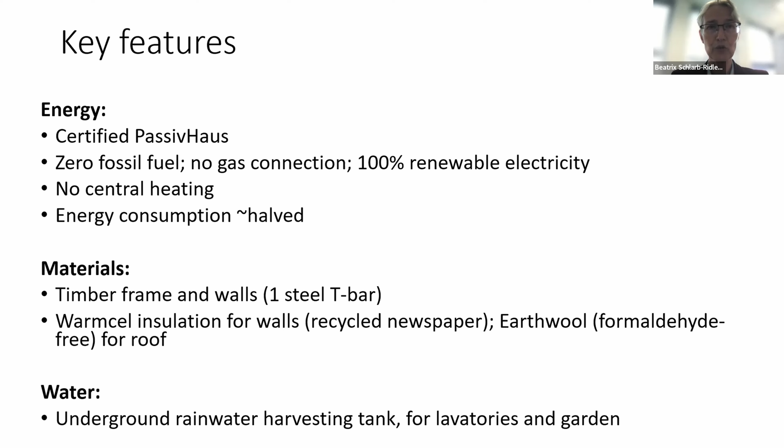So let me take you through the house build story, starting with the foundations. The concrete slab helps to provide thermal mass to the otherwise mainly timber frame building. We went for a partial offsite build of that timber frame. The first photo is at the site of Anson Timber in Suffolk, who prefabricated these cassette boxes, and on the right, they're on our site.

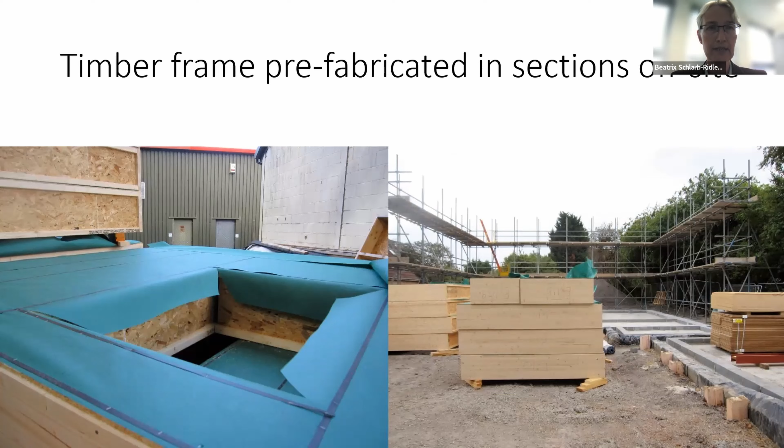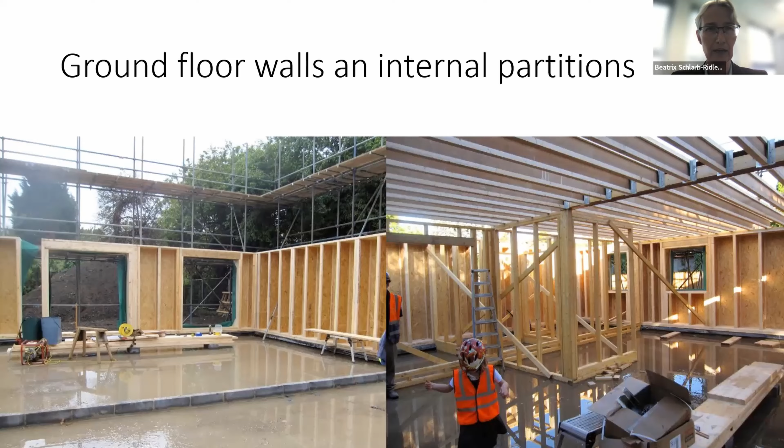All walls and ceilings were covered with airtight membrane, which you see here on the left, together with the triple glazed windows being installed. The membrane is secured with wooden battens, and on top of those go the plasterboards. And from then on, basically, it looks like any other new build.

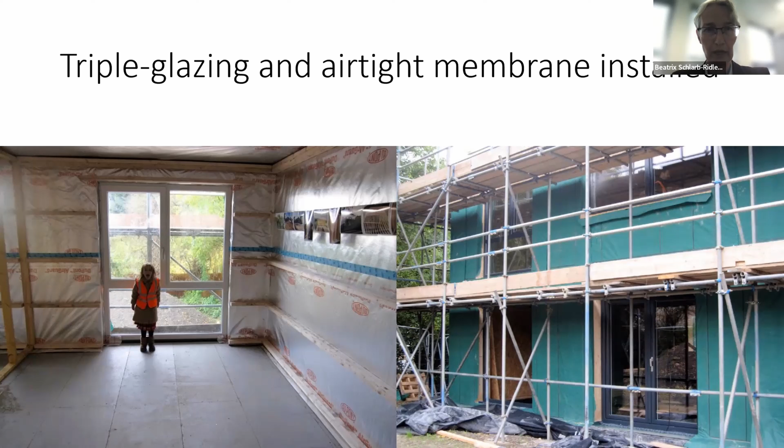The extra 10-centimeter gap that's created by the battens between the membrane and the plasterboard - I'm not sure whether you can see my mouse following the battens here - is essential to avoid anyone by accident puncturing the airtight membrane when they put a nail or a screw into the wall later on. So here you see one of the key features of a passive house, the MVHR unit.

On the right, a passive house schematic. Our house doesn't have a basement, so the MVHR sits in the ground floor rather than underground. And we also don't have this long blue loop of a subsoil heat exchanger, unfortunately, but take the air in directly from the north facing side of our utility room.

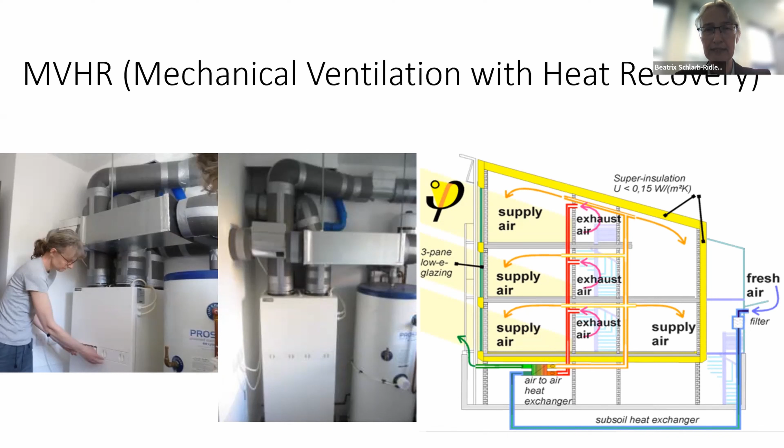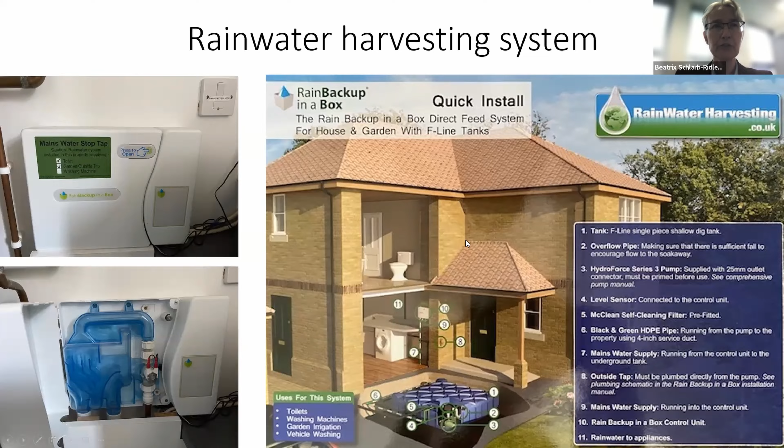Another key feature is the rainwater harvesting tank that feeds the toilets and the garden tap. On the right, you see the installation schematic, and on the left, the internal control unit with the mains water backup.

Essential to controlling solar gain for the south-facing windows are the external Venetian blinds. In summer, we have them continuously down with the slats horizontal for shading, because if you forget to do that during sunny days, you literally roast.

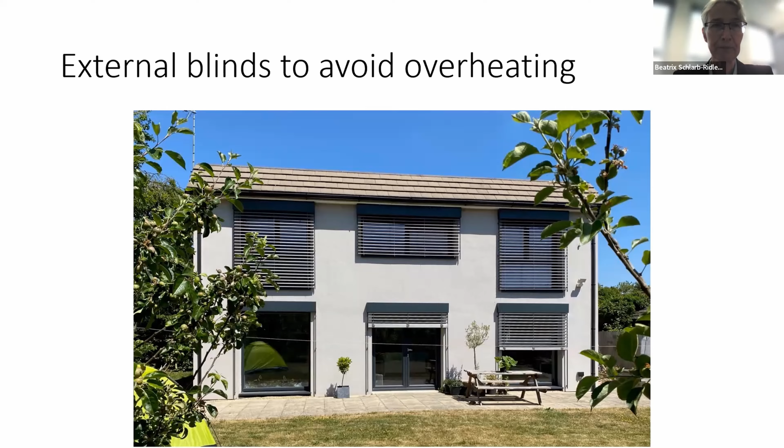We were meant to be the first installation. Sadly, that fell through quite late in the project, and we ended up with a conventional MVHR and an electric water heater. At that stage, it was too late to switch to solar thermal heating.

The high user comfort depends on how you define it. In the first winter, when we just depended on the systems as they were installed, the temperatures did go down to about 14 degrees at times, and we decided that wasn't thermal comfort, and we did need some additional point sources of heat. We bought 3 small electric radiators, which we use on timer functions and mostly at the lowest setting during the depths of winter when the days are very short and therefore solar gain is minimal. And that works very well.

The advantage over heating through the MVHR centrally, which was the original intention, is that we only heat those spaces that we actually want warm. I don't want a warm bedroom, for example, or a warm guest room when there's nobody in there. So these point sources of heat actually work better for us as users.

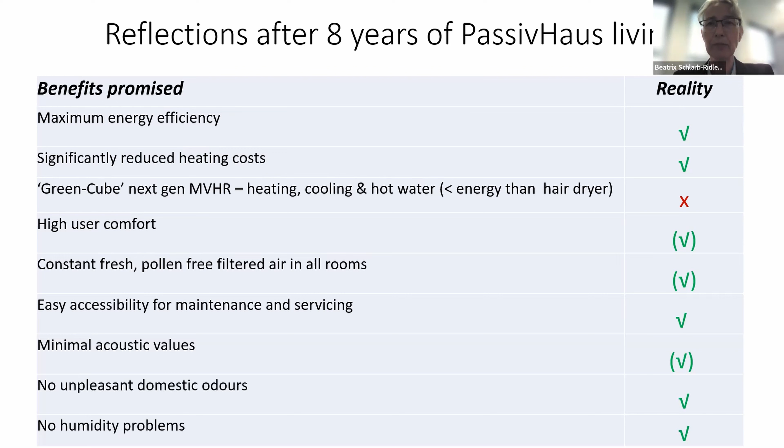The constant air exchange works a treat at getting rid of odors such as cooking smells, and it's also very helpful for humidity control in all the living areas. In the bathroom, we do open the windows straight after taking a shower to help with getting rid of moisture, and with that, moisture has not been a problem.

So finally, to share the key lesson: aim high, but accept that one will likely need to compromise in the process. As I mentioned at the start, we had much grander plans initially, but couldn't help that some things fell by the wayside in the process.

Maybe because of lack of availability or timescales or financial implications or opposing drivers, especially ease of maintenance. So aiming high initially meant that most of the key sustainability features were retained in the end.

So this was very much a whistle-stop tour, but I hope it has contained some useful information, and I'll be very happy to expand on this during the panel session.

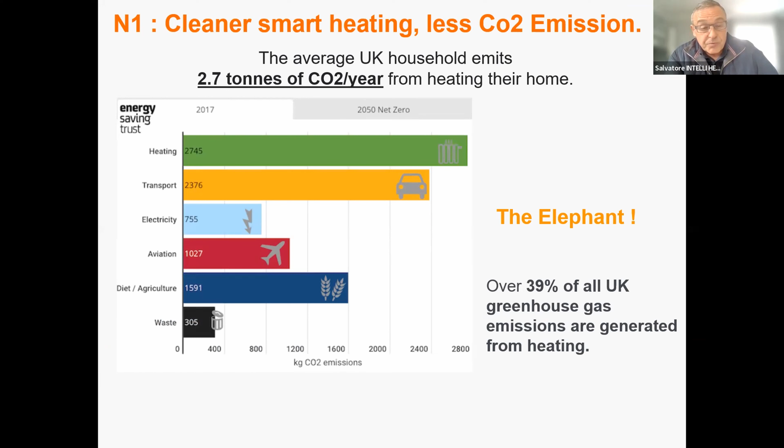Those are basically the measures we took as a managing director of the company. Okay, we can change the building fabric, upgrade to double glazing, triple glazing, but the big chunk for us was the heating.

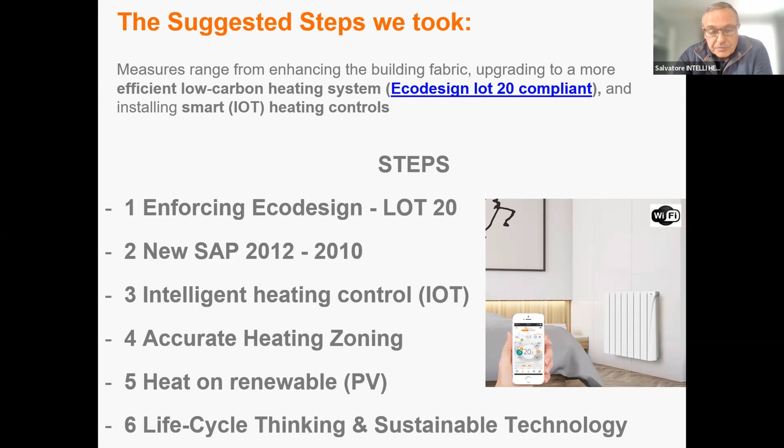The steps we took: enforcing Eco Design Lot 20 legislation, trying to change the new SAP 2012-2010 methodology of calculation, intelligent heating control, Internet of Things, accurate heating zoning - as you mentioned Beatrix, it's important to not heat more of the house than you need - heat on renewable, and life cycle thinking, circular economy.

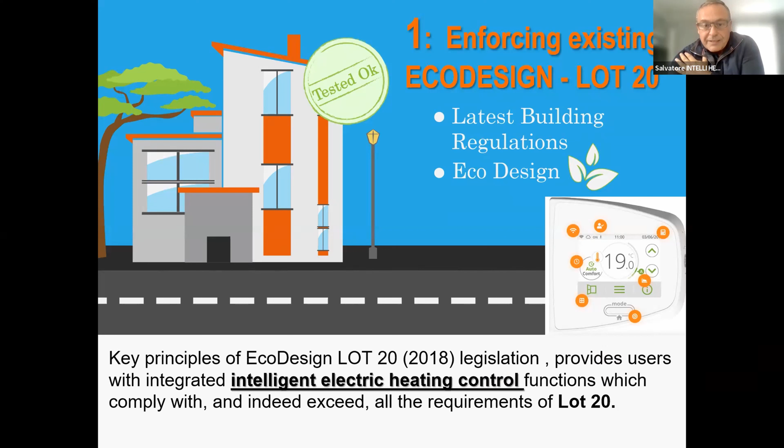Eco Design Lot 20 is a basic one, 2018 legislation, that basically offers clients the possibility to use intelligent heating control. The key principle of Lot 20 is that basically you cannot use an analog thermostat like a storage heater, panel heater, or an uncontrollable one.

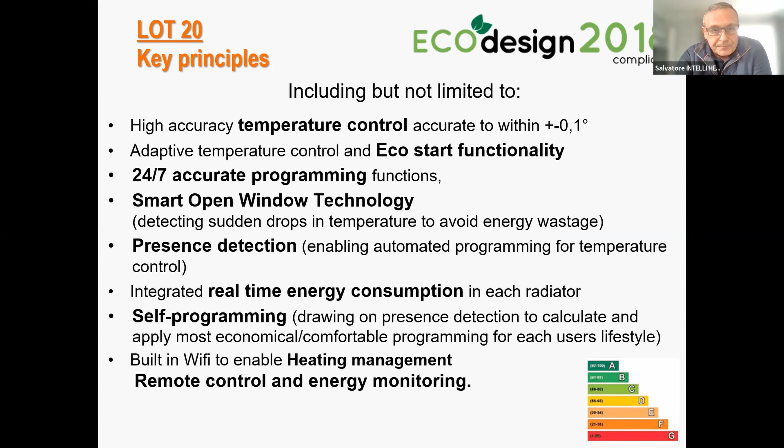You need a temperature control that is accurate. You need an adaptive temperature control, an eco start, smart open window detection, presence detection, real-time energy consumption, and self-programming. And of course, if you can, a Wi-Fi heating management control. We've got all that in our product.

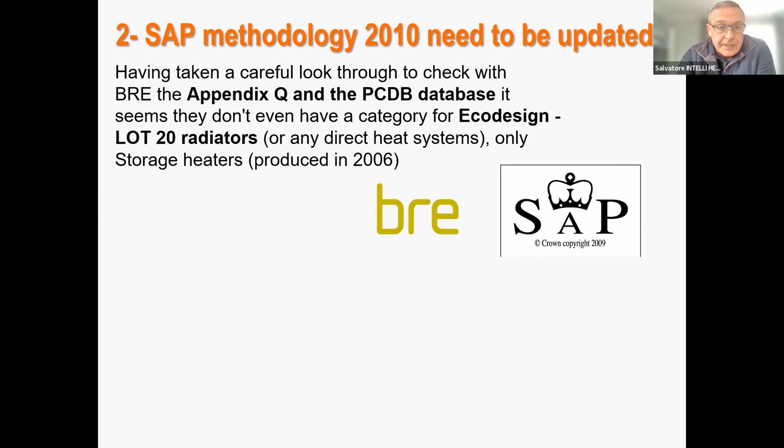The second was the SAP, trying to convince them that it was a little bit unfair to have only Dimplex storage heaters on the SAP, bearing in mind there are loads of products available today and they're much more efficient than storage heaters produced in 2006.

Control is the key of our product, bearing in mind that since we integrated smart IoT, Internet of Things technology into our products in 2001, we've reduced energy consumption by probably 35-40% in each house in the UK. That's about 60,000 houses so far.

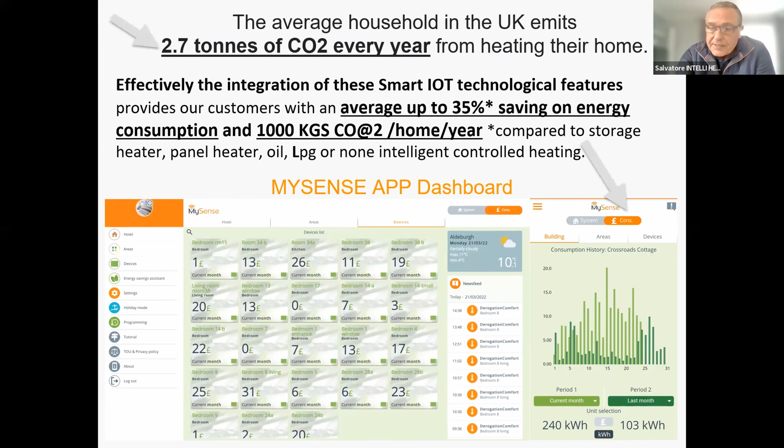It's all about zoning. With our energy management system, with our heating management system, we can control individually each radiator, each zone. So let's say we can control 1,000 radiators based in Glasgow or Edinburgh or everywhere in the UK at the same time. Those are all the functions we've built into our products.

They're not gadgets, they're energy consumption reduction features. So you can control your heating in real time. But most importantly, I think the app, the cloud-based app, will automatically adjust all the settings. So you put the program in, fine, leave it run for a week. The app will come back to you with a feed, and it will suggest the best option for your lifestyle.

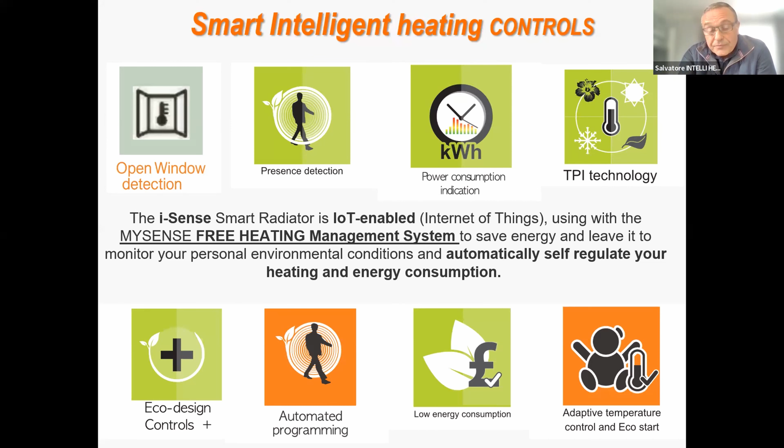That means it's going to adjust automatically because they've got sensors. They're going to adjust automatically temperature, background, comfort temperature, but most importantly, the running of the system. So it's all about Internet of Things. Our future relies, in fact, on interconnected systems.

Our cloud-based app will control the heating, but will control as well the hot water - that's another big chunk. Hot water, lighting, everything electric, basically.

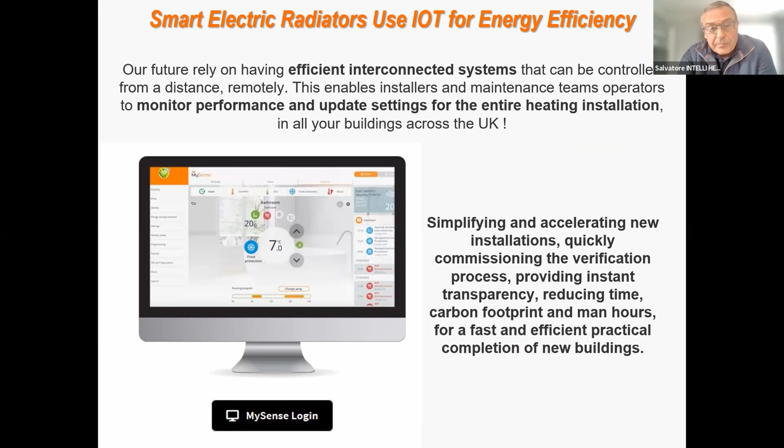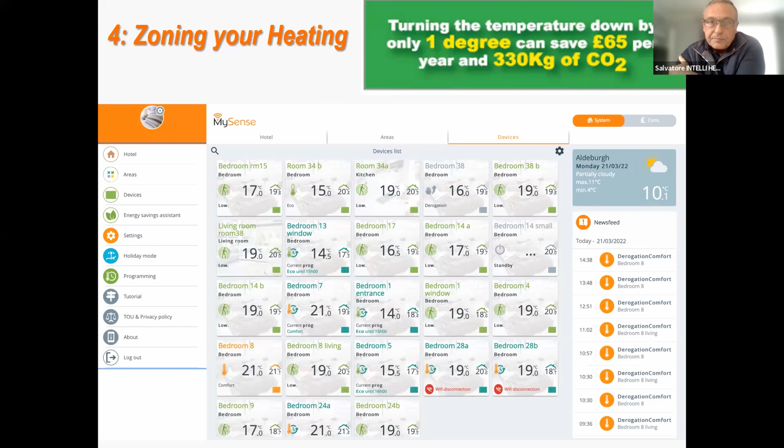Again, that's a screenshot. Why do we want to control 0.1 degrees? Because 1 degree in a room - 21 instead of 20 - is £65 per year on your bill, and it's 330 kilos of CO2. Of course, all the radiators work on PV.

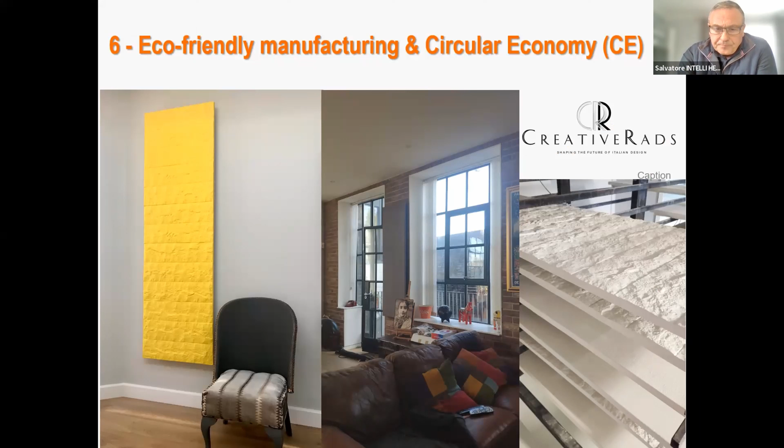And our latest baby, I call it baby, is the CreativeRads. So they're basically radiators that have been designed with recycled marble. So everything you see there is all recycled. And of course, it's life cycle thinking and sustainable technology, as is Summit, basically.

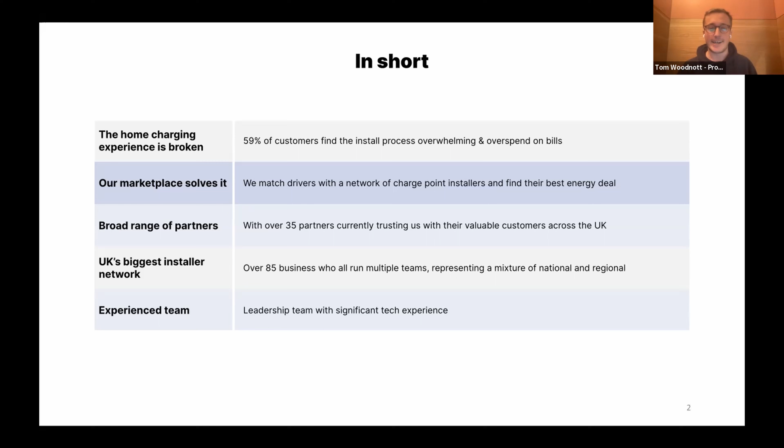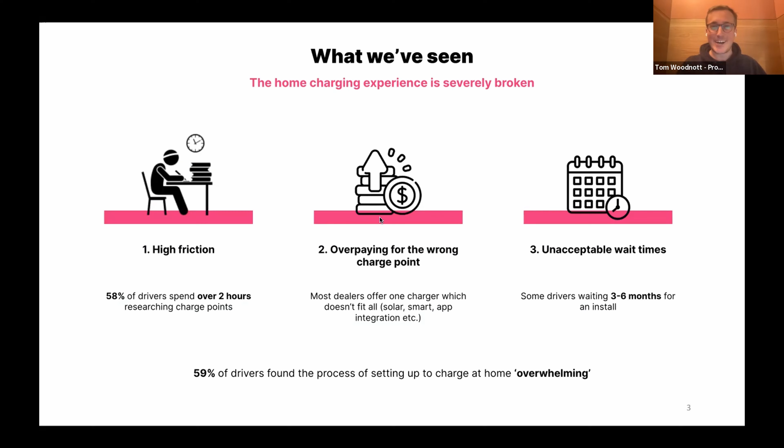We're coming at it from a tech-first business, using inspiration from platforms like Airbnb to try and create a super customer-centric platform. I appreciate I've run out of time, but we also try and make other aspects of the installation super easy as well. So apologies, I've run over, so I'll stop there. But hopefully that was a whistle-stop tour on what we do.

Thank you very much, Tom, and thanks for keeping track of the time, and for sharing your screen too, that I can see again. I wish I was on that, but thanks for that. Yeah, no, it's great to also think about the house, but it's just what's happening just outside the house too.

So am I right also to think that you are still looking for some funding at the moment? And put you on the spot, but there might be some people here, investors and so on, so feel free just to confirm or not.

Unfortunately, yes, I'm not as close to the funding as our founder Charlie Cook, but yes, we are raising another seed round this year, and I think it's closing very soon.

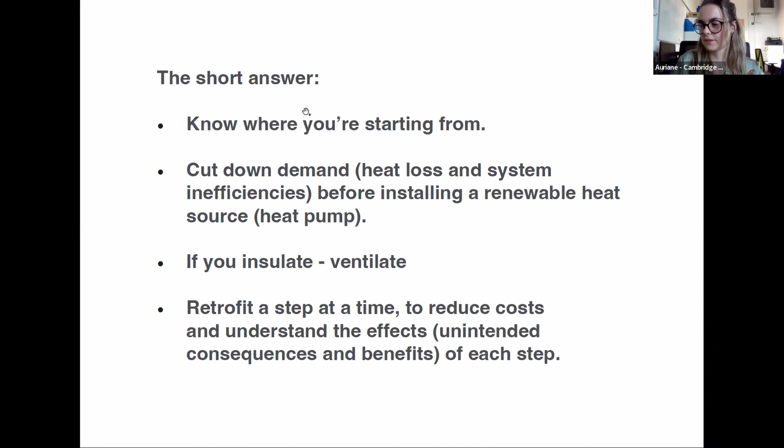The short answer is to know where you're starting from, to cut down your demand, your heat loss and system inefficiencies before jumping to install a renewable heat source. If you insulate, you've got to ventilate, and I'd recommend you do this a step at a time to reduce your costs and to understand the effects, unintended consequences, and benefits of each step.

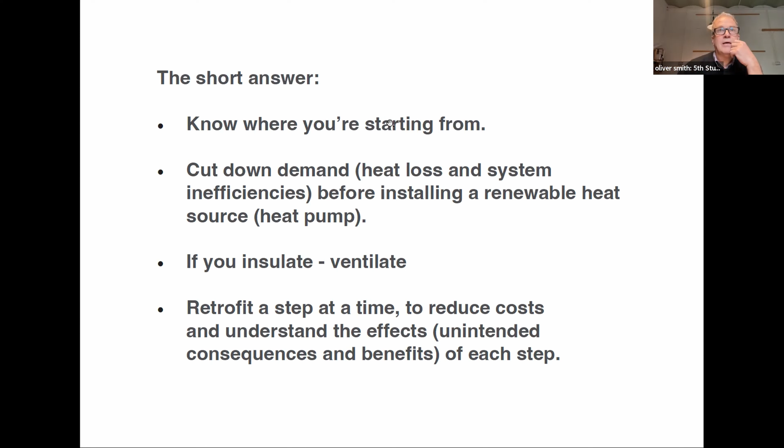This is based on a series of retrofit projects we've done. I went back to Trinity this morning to look at it, and it's looking fantastic, and the client is really happy. It's a very healthy building.

In terms of knowing where you're starting from, obviously you need your fuel bills, but I think on listed buildings there's a range of possible in situ fabric performance measurements that give you real insight into the design and what you need to get consent for.

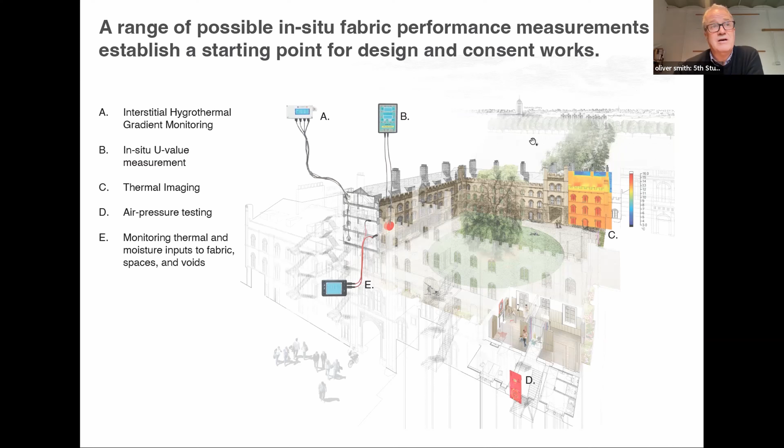On Trinity, this is New Court Trinity, we did absolutely everything, and some of it probably had pretty limited application, but I think in situ U-value measurement is an amazingly informative tool, and obviously thermal imaging combined with air pressure testing will tell you a lot about where you're losing heat.

This kind of information is now required by Cambridge City Council's adopted planning policies. They basically took the methodology we worked through with them on the Trinity project and turned it into their policies.

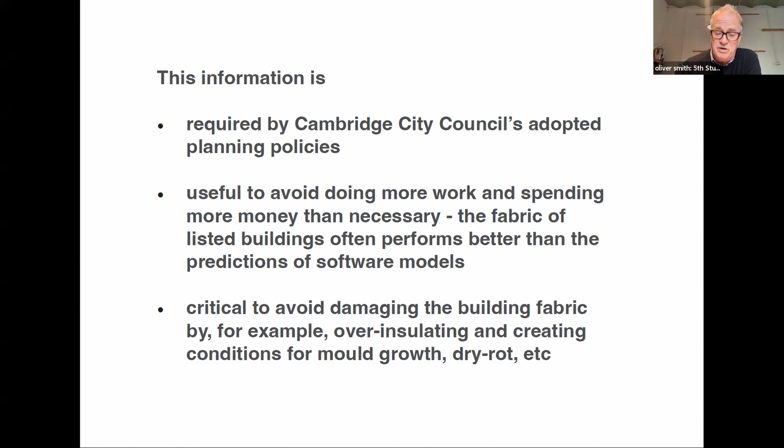I think knowing where you're starting from can save you a lot of money, because the fabric of listed buildings often performs so much better than the prediction of software models, and can save you from damaging your building fabric by over-insulating it and creating conditions for mold growth and dry rot.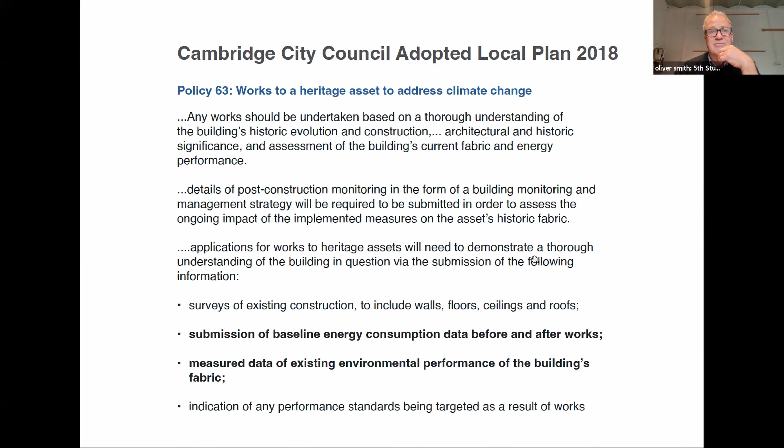I seem to have missed a slide. That's Cambridge's adopted planning policy, and they look for measured data of existing environmental performance of the building's fabric as a precondition to discussing what you might do with it next.

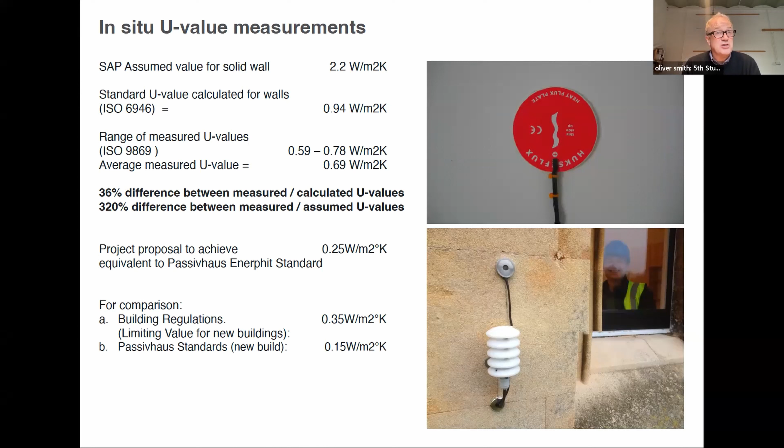In situ evaluation of walls: a SAP model assumed value for a solid wall is 2.2, standard U-value calculation from Build Desk is 0.94. If you actually measure it, on Trinity we ended up with an average value of 0.69 watts per meter squared Kelvin. That's a 36% difference between the measured and calculated values, and a 320% difference between the measured and assumed U-values.

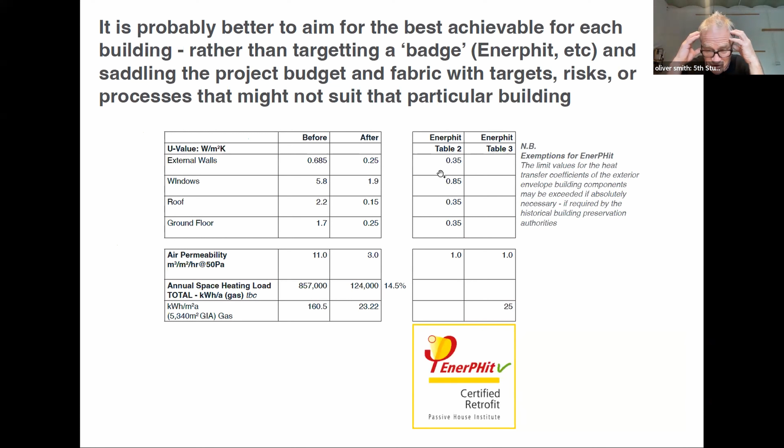So it's really worth doing. It's probably better to aim for the best achievable for your specific building rather than aiming for a badge.

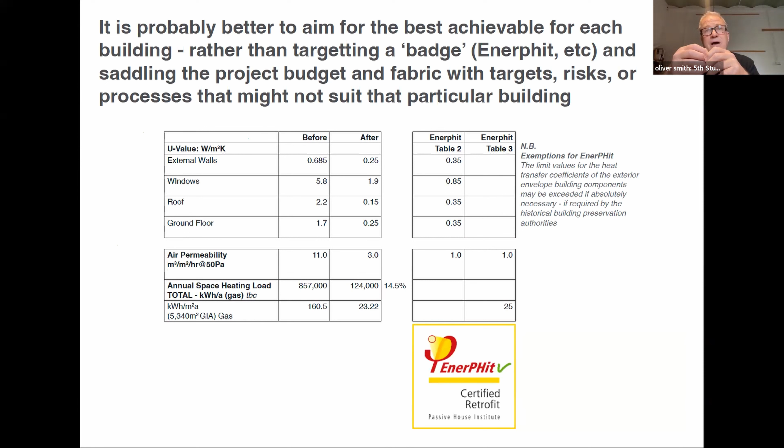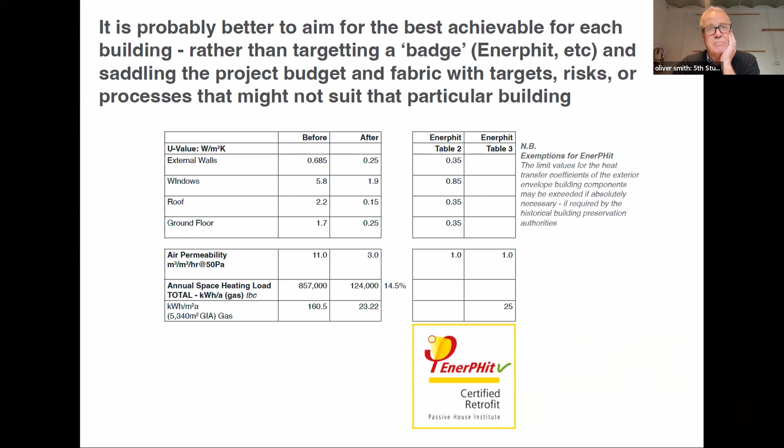There's a lot of talk about EnerPHit at the moment. The Trinity figures show we are doing better than EnerPHit in terms of the actual kilowatt hours per meter squared heat energy used in the building, but we don't meet all of the criteria, because of the sensitivities of some of the forms of construction and fabric involved, and certainly getting air permeability down to 1 meter cubed per meter squared in a listed building is really tough.

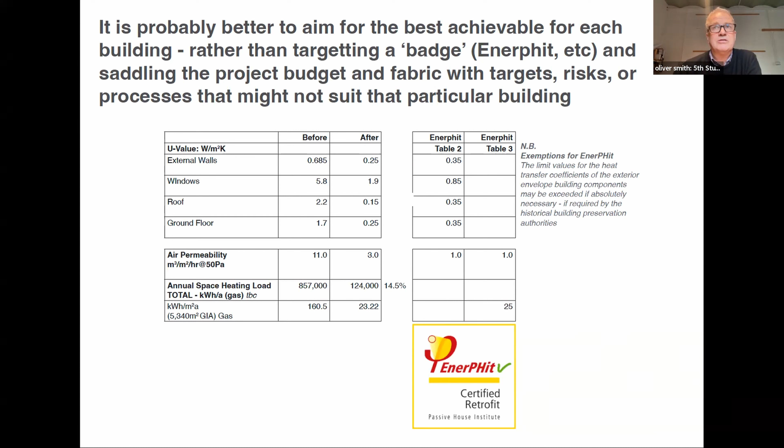We aimed for 3, but we started at 11. So there are swings and roundabouts. I wouldn't go for a badge unless I really needed to, because you can saddle your project with targets and risks that you just can't safely meet.

Some immediate solutions and potential suppliers from my address book. Obviously, others are available.

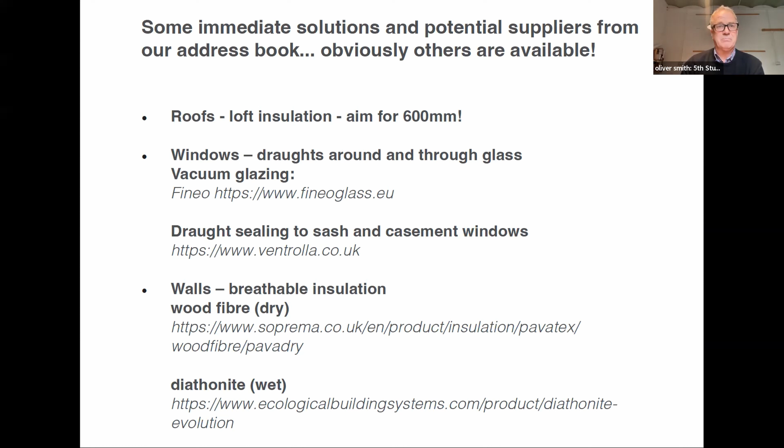The amazing new vacuum glazing product on the market came to talk to Cleantech earlier in the year - Fineo glazing from Belgium. Ventrolla do a really good draft sealing system for sash windows. And then there are any number of breathable products to make your historic buildings have breathable walls, vapor permeable - don't use plasterboard, don't use OSB, keep the moisture and air moving through your construction.

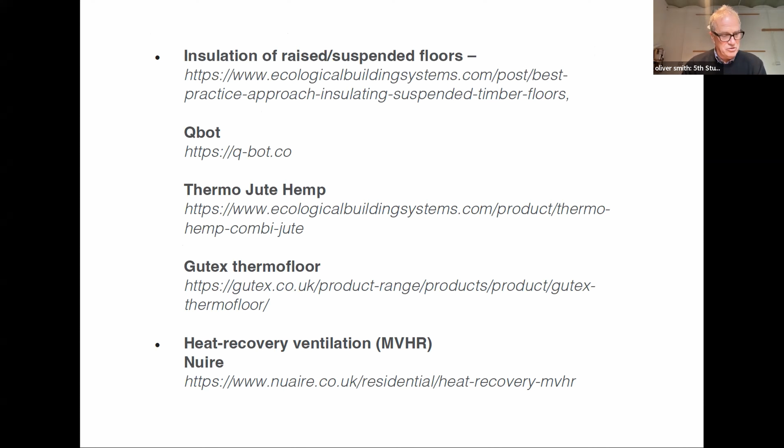Insulation of raised suspended floors is very difficult, but we just used Qbot on a project in Oxford, and heat recovery ventilation as Beatrix used in her house. We used it at Trinity too. Historic buildings quite often have chimney flues - a perfect place to stick your supply and extract ducts.

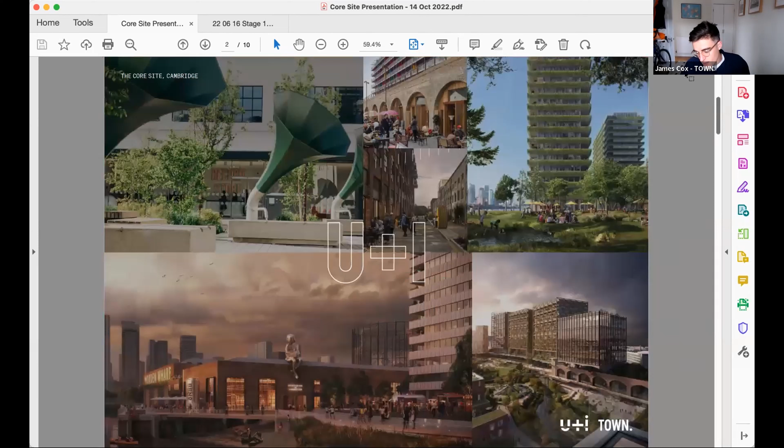Amazing, thank you, Sylvia. I'm James Cox, a development manager at Town, and we're working on the core site in northeast Cambridge, which I'm going to talk to you about today. We're working with an organisation called U+I, and together we are the master developers of the core site, which is a really long-term project. It's the last large-scale brownfield site in the city, and one day it will be home to over 10,000 people, which is slightly mind-blowing but also very exciting.

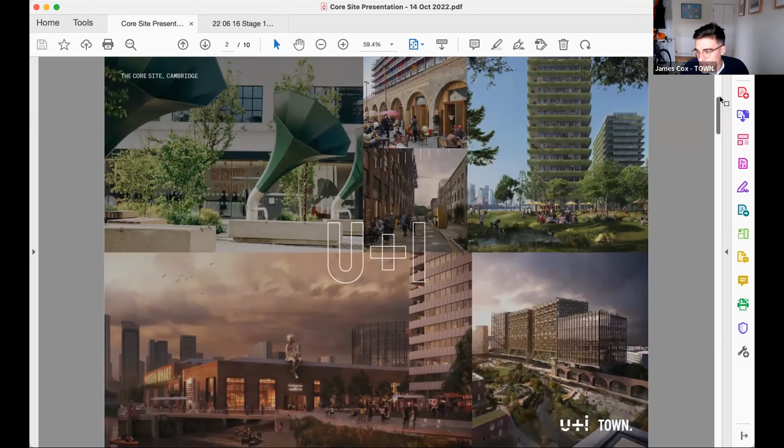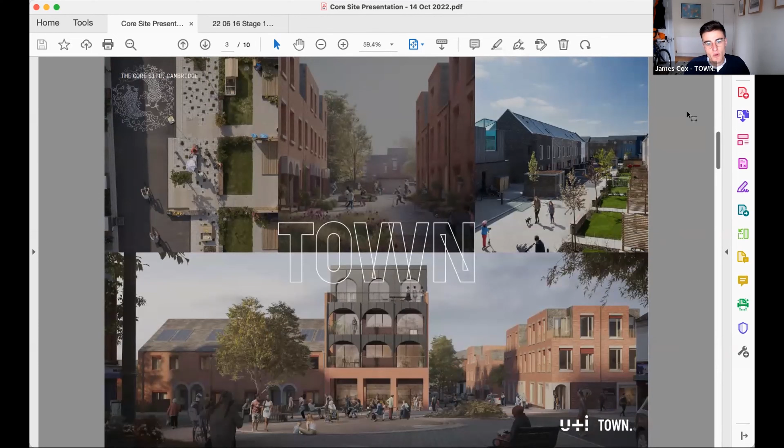Town and U+I are kind of experts in mixed-use regeneration. I work for a company called Town, who are a smaller SME developer that focuses on creating good places for better lives. We've done one scheme to date, which is Marmalade Lane at Orchard Park in Cambridge, which some of you might have heard of or even visited.

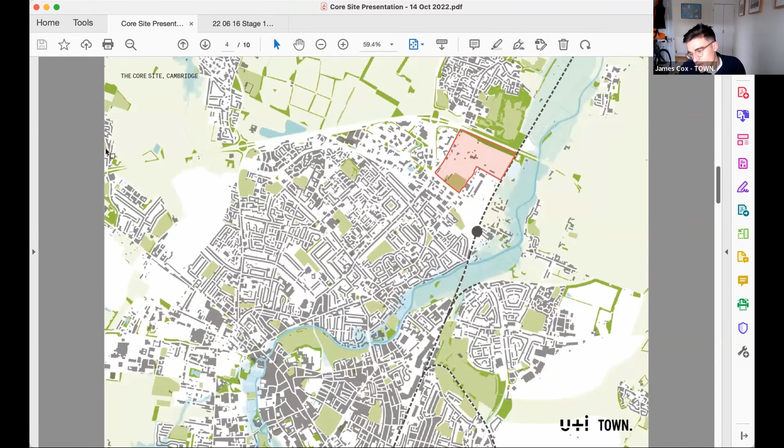So this is our site outlined in red. As I said, 48 hectares located on the northern edge of the city, close to Cambridge North Station, which is that black dot there. The site itself is surrounded by a number of largely commercial uses, innovative places to be, such as St John's, Cambridge Science Park, Cambridge Business Park, all immediately surrounding the site, as well as residential areas of East Chesterton, King's Hedges and Milton Country Park.

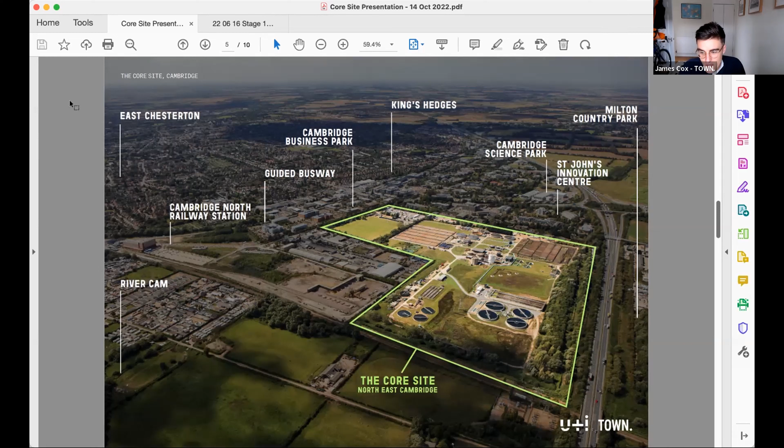What's exciting about this site is that the scale of it is so vast that it provides us the opportunity, as well as the necessity, to try and do things differently, and to do things within the context of the climate emergency, which we're all unfortunately working in at the minute.

What we've tried to do at the start of the project is set out a clear vision, including some guiding promises and values which guide us at every step, not only in the design work with the professional team, but in how we procure, how we engage, and ultimately how we deliver the project. Particularly relevant for today's session is our promise to the planet: that the core site will be an exemplar development fit for the challenges of the 21st century, enabling sustainable lifestyles by default, meaning people's automatic choice will be something sustainable, and accelerating the transition to a net zero carbon world.

Underneath those promises, we have a collection of values around being rooted in Cambridge. So the site will be a really key part of the city moving forward, shaped by many, which I'll touch on later, and again, it will be a place that lives within our own means.

That means the core site will be a place that's innovatively designed and constructed. It will make the most efficient use of valuable natural resources, such as land, by building high density, water through water-sensitive design, and designing low energy buildings. We think that doing this amongst a plethora of other tactics will help us fight the challenges we're facing today, while making it easier for people to live more sustainably day to day. Sustainability and quality of life is a really big focus of the project.